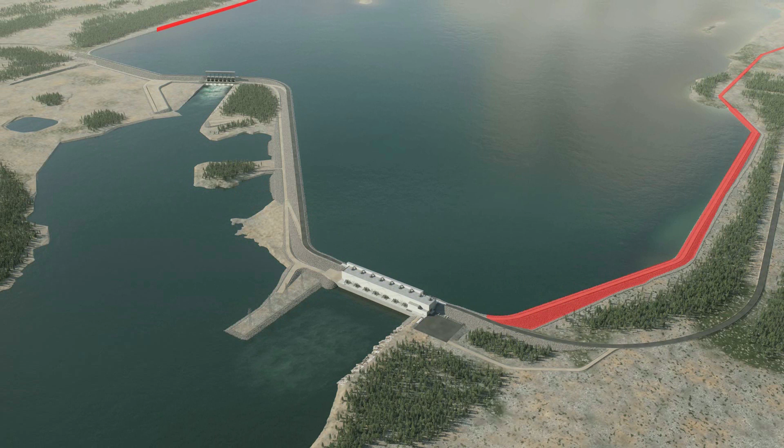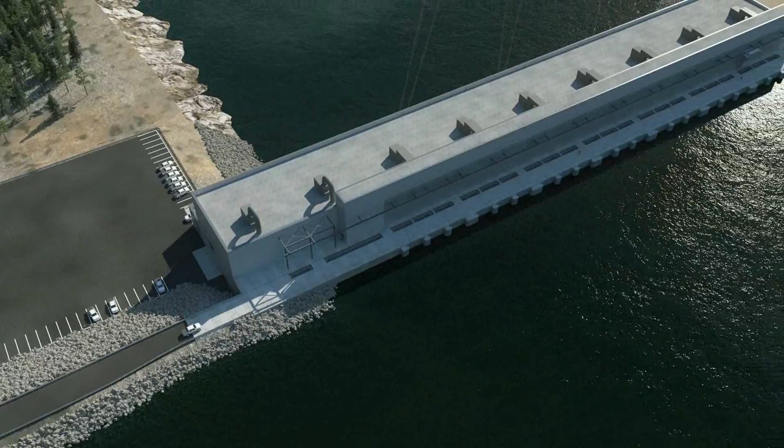The Keeyask project consists of a hydroelectric generating station and related works, including 2 long riverbank dikes on the north and south, linked to the principal structures which span the Nelson River at Gull Rapids. The principal structures consist of a powerhouse complex constructed on the north side of the river, connected to the North Dike. The spillway will be located on South Island. A central dam will connect the spillway and powerhouse structures, connected to the South Dam by means of a short concrete transition structure.

General construction process.

The proposed general construction process is based on a schedule starting on June 27, 2014 and finishing on December 14, 2019.

Construction activities will include the commencement of the Stage 1 diversion through construction of the quarry cofferdam, discontinuing flow within the northern channel of the river, as well as construction of the North Channel rock groin and the causeways to G3 and N5.

Construction of the North Channel Stage 1 cofferdam, construction of the Powerhouse Stage 1 cofferdam, diversion of the entire flow of the Nelson River through the southern channel, and construction of the Stage 1 Island cofferdam.

In order to take advantage of the 2015 summer window, the Central Dam Stage 1 cofferdam and rock groin will be built. At the beginning of winter 2014, excavation for the powerhouse will commence.

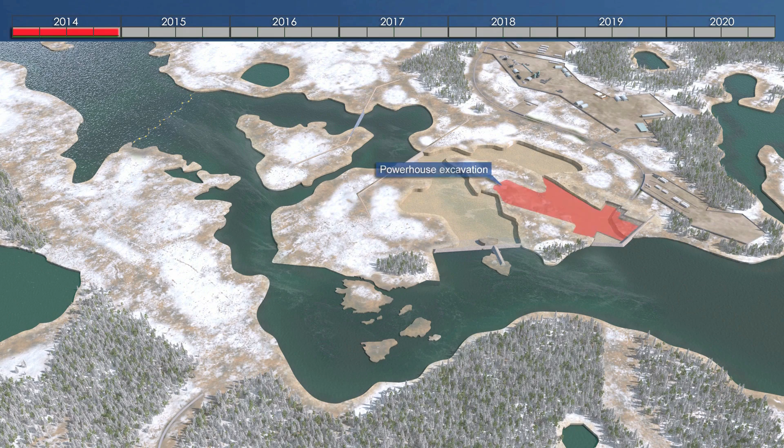The tail-race summer-level cofferdam will also be built to finalize all the excavations. During the summer window of 2015, the main body of the central dam will be constructed, leaving the connections with the transition walls for a later stage.

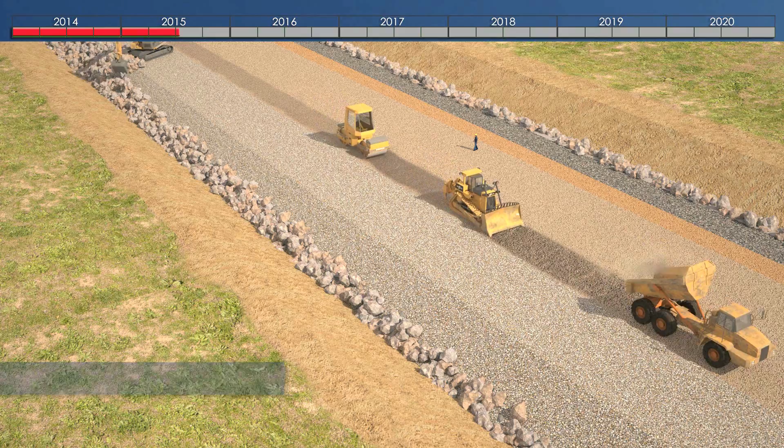In 2015, construction of the Spillway Stage 1 cofferdam will take place. The Stage 1 diversion will permit undertaking of the excavation works and construction of the principal structures. Throughout the Stage 1 diversion, the river will be confined to flowing through the southern channel of the Nelson River.

Construction of the North Dike will start in 2015, including excavation and construction of the earth structures, including the North Dam, parking lot, and North Access Road ramp.

This will see the partial completion of the northern section of the South Dam prior to the Stage 2 diversion, and the full completion of all other scheduled construction activities inside the Spillway Stage 1 cofferdam, as well as construction of the Stage 2 Island cofferdam, and finally the breaching and removal of portions of the Spillway Stage 1 cofferdam.

Beginning of the Stage 2 diversion by closing the river channel with the advancement of the South Dam Stage 2 upstream cofferdam from the Stage 1 Spillway cofferdam to the south side of the river.

It will also close the South River channel and direct flow into the open sluiceways through the spillway for diversion purposes. The Stage 2 diversion will allow construction of the South Dam, the South Dike, and access to the South Shore.

In the dry, removal of the northern leg of the Powerhouse Stage 1 cofferdam will occur. The southern leg of the Stage 1 Powerhouse cofferdam will remain in place and form part of the transmission tower spur. Construction of the transmission tower spur follows.

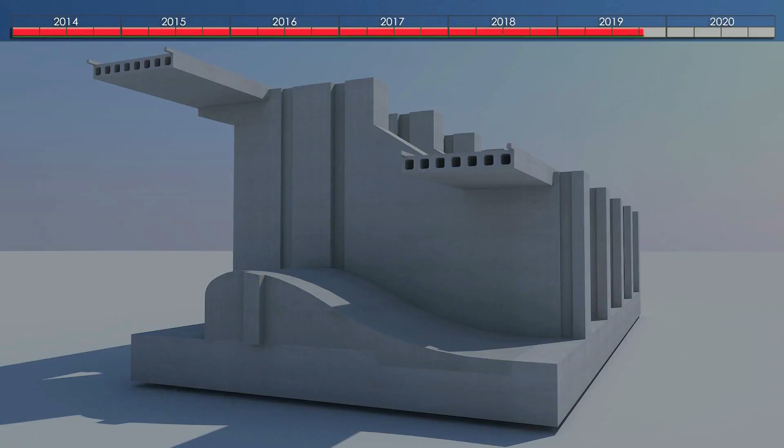Breaching and removal of the tail race summer level cofferdam. Impoundment of the forebay in stages linked to closure and construction of the spillway rollways. And finally, closure of the remaining sections of the spillway.

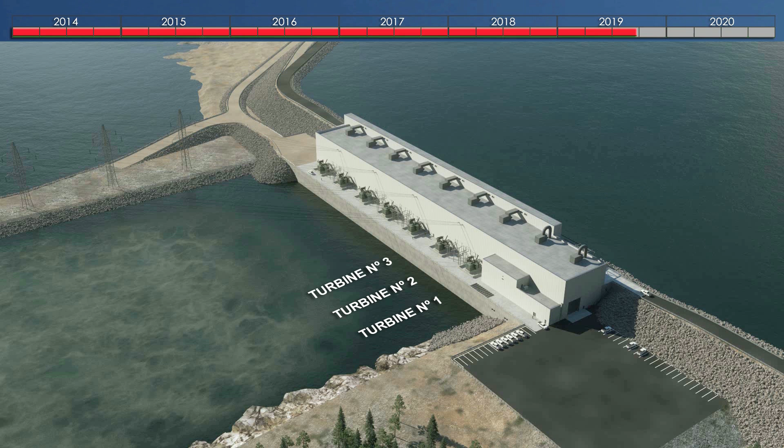Commissioning of the turbines will take place on the following dates. Turbine number 1 will be commissioned on August 16, 2019. Turbine number 2 will be commissioned on September 21, 2019. Turbine number 3 will be commissioned on October 23, 2019. Turbine number 4 will be commissioned on November 6, 2019.

Turbine number 5 will be commissioned on January 8, 2020. Turbine number 6 will be commissioned on February 15, 2020. Turbine number 7 will be commissioned on May 2, 2020.

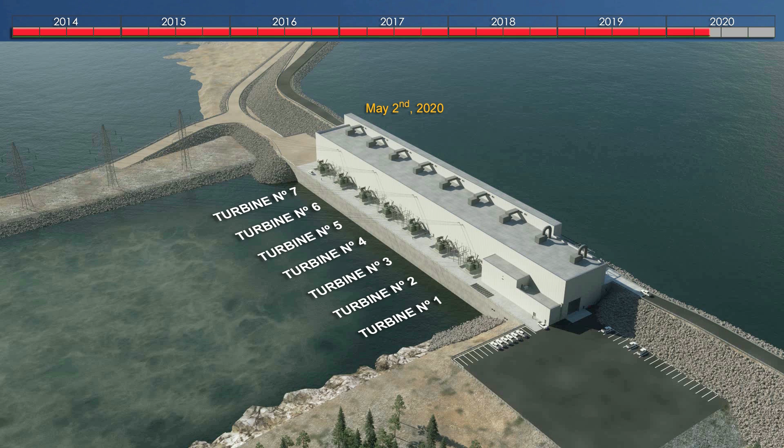Powerhouse construction process.

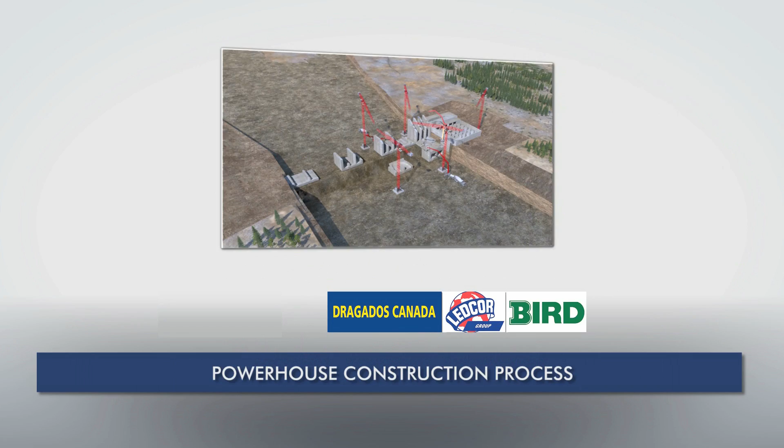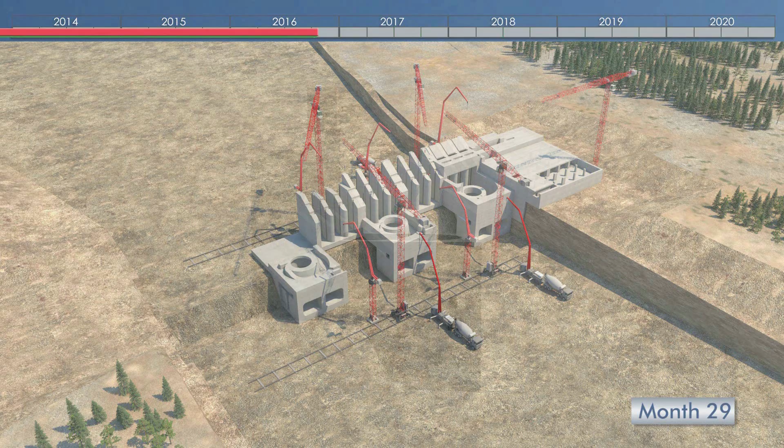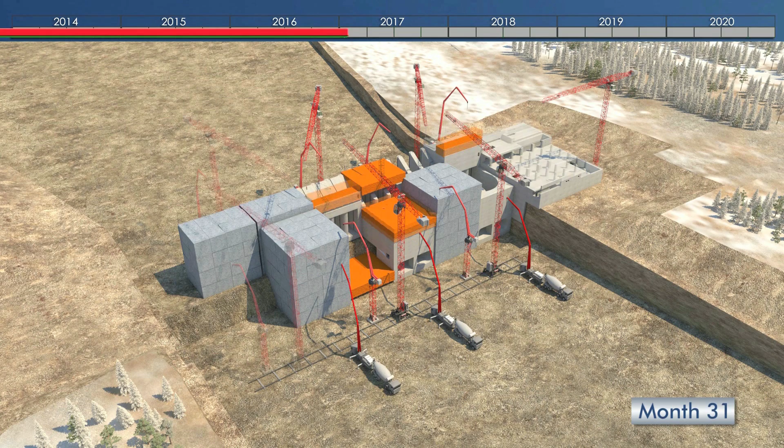The core methodology behind the construction of the powerhouse building will be to quickly erect the intake to its full elevation at 173.5 meters, as well as the lower block of the powerhouse to a level high enough to install the structural steel roofing on. This will be completed as early as possible within the time plan in order to enclose each unit, enabling work to continue under cover. A sheltered work area will facilitate work during the winter months and contribute to schedule advancement.

When the erection of any of the units occurs during the winter, hoarding will be used. Given the height and smaller size of these pours, only a winter hoarding consisting of insulated blankets will be used.

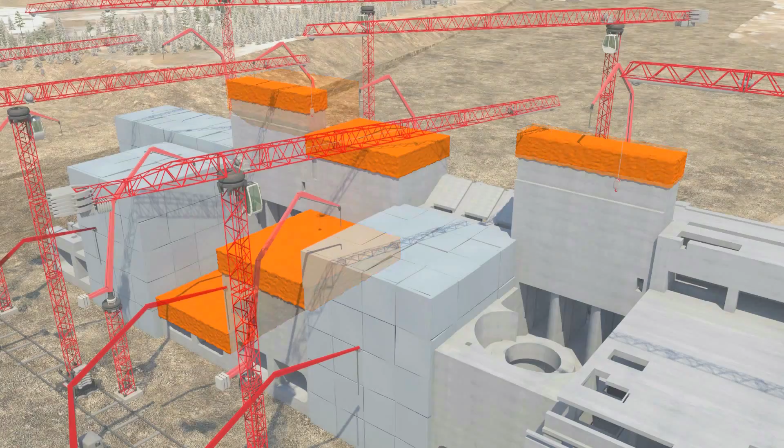The powerhouse blocks in Units 1, 3, and 5 will commence at the same time as the intake and the service bay units. To achieve this, there will be 2 shifts per day.

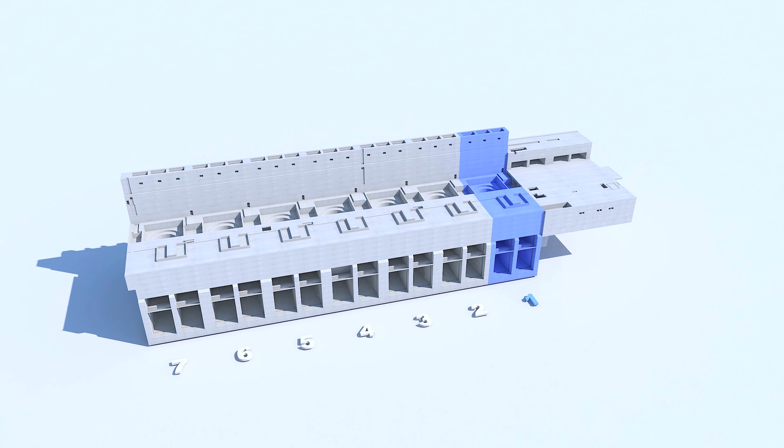Once the crews have completed Units 1, 3, and 5, they will be reassigned to the remaining units. Namely, the crew from Unit 1 will go to Unit 2 and then to Unit 7. The crew from Unit 3 will go to Unit 4. And the crew from Unit 5 will go to Unit 6.

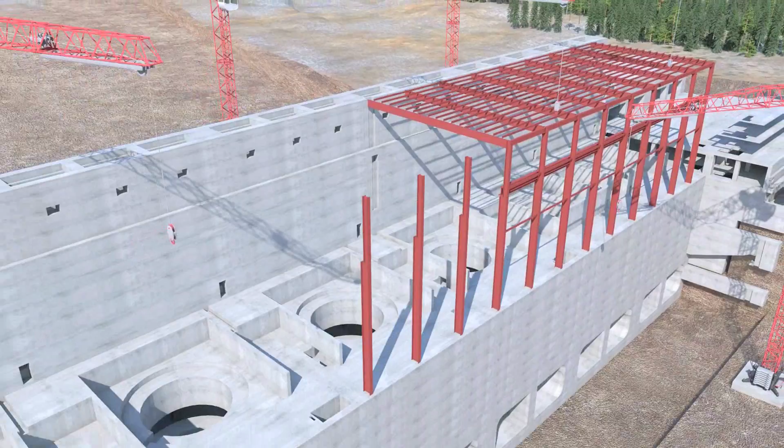The superstructures, or roof, for each unit are built in cascade from Units 1 to 7, as Manitoba Hydro requires, in order to allow the use of the bridge cranes from the service bay to each unit.

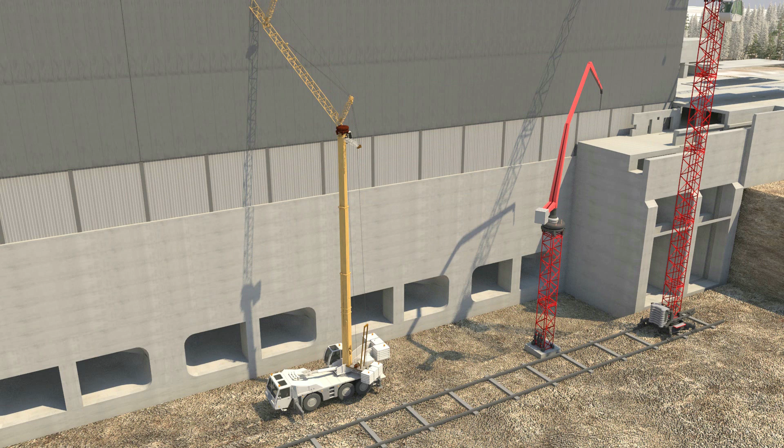The erection of the tail race will be delayed until the structural steel has been placed and the associated crane has been moved out of this position.

Given that the roofs are placed late in the schedule, 4 crews will be used at certain points. No challenges related to the increased manpower need are expected at this point, as most of the crafts from the spillway and the intake will be completed by this time.

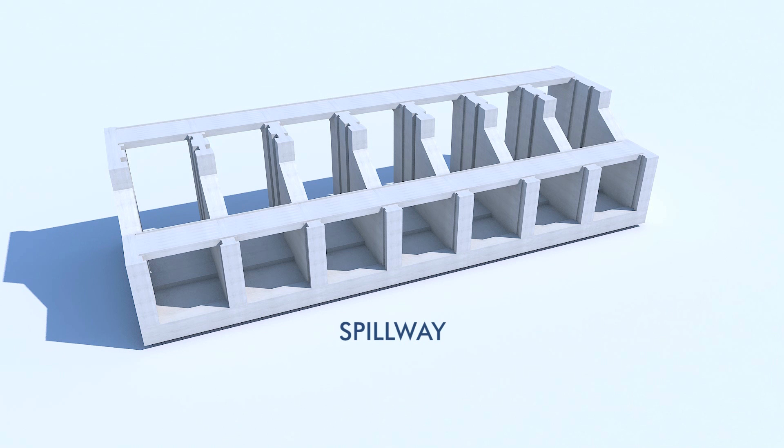Per unit construction plan.

The joint venture will begin construction of IN and PH1. Work will stop on the powerhouse once the elevation of 141.1 meters is reached in the lower cone and 143.7 meters in the walls, where the steel structure is placed.

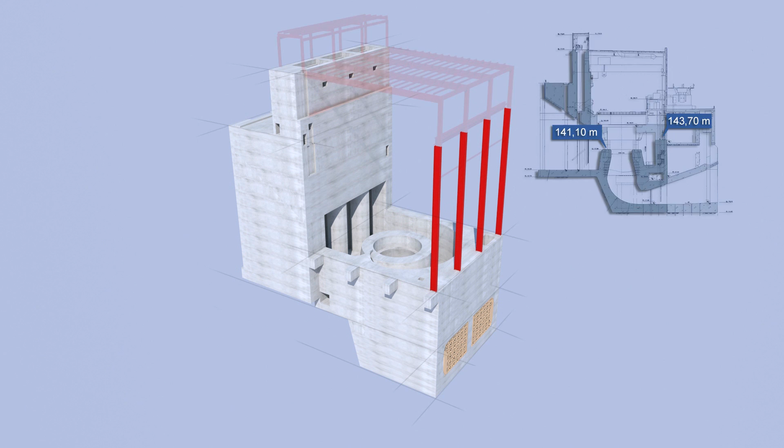Once IN and PH1 blocks are finished, the roof will be installed so that winter work may commence inside the covered area. The roof will allow the PH2 block to be completed indoors, including the concrete and mechanical elements.

Once the roof structure is placed and the crane is moved away from the tail race position, the construction of the TR1 block will commence, and then the TR2 right after.

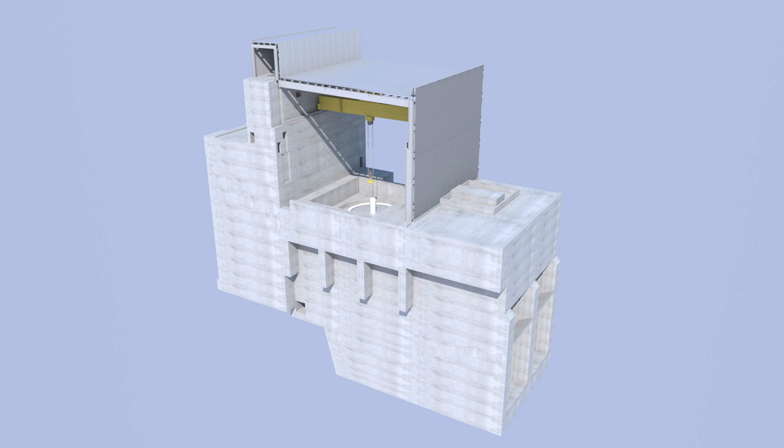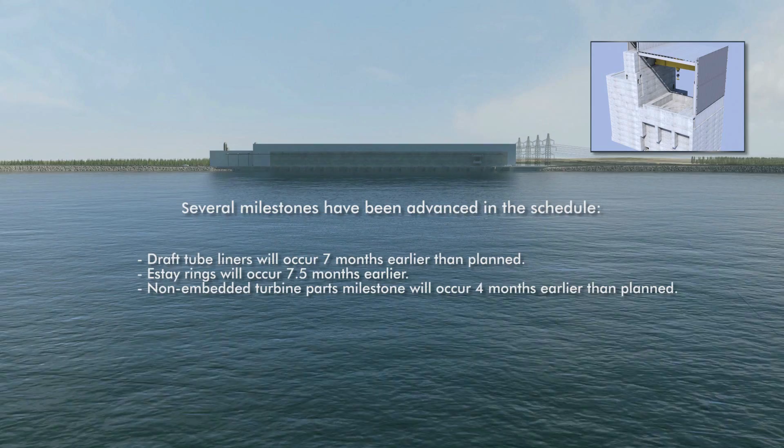The plant ready for non-embedded turbine parts milestone will occur 4 months earlier than originally planned. The ready to start final commissioning milestones now occur between 3.5 and 5 months earlier than originally planned, and the in-service dates will occur approximately 4 months earlier than originally planned.

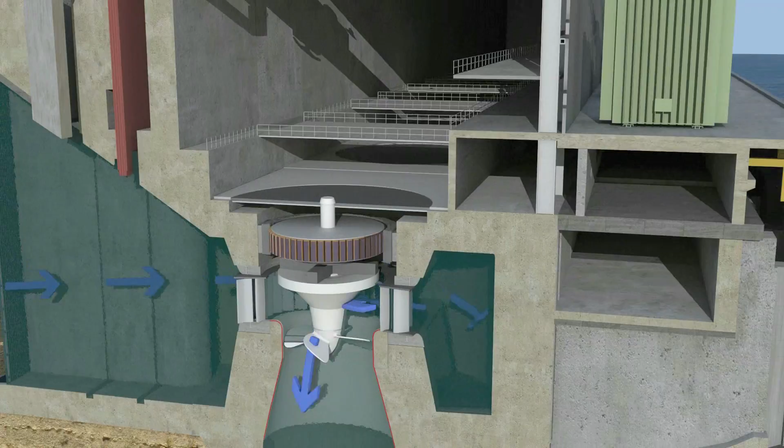Joint venture experiences on similar projects.

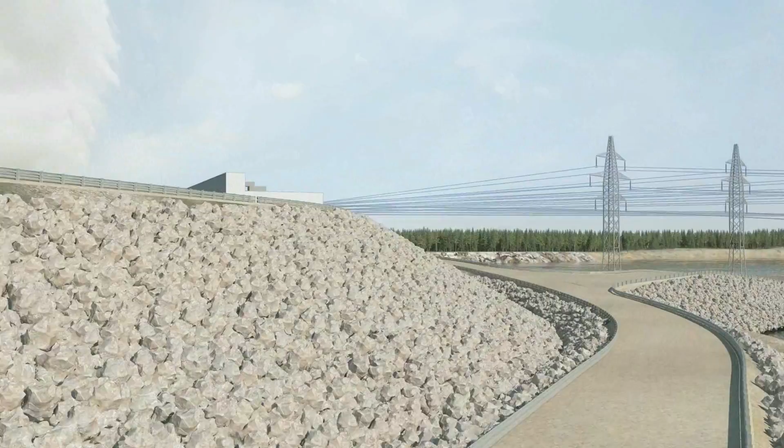Owing to the extensive experience and success on similar projects, the Dragados Canada Ledcor Bird joint venture is uniquely qualified to undertake such a challenge.

Caruachi Hydroelectric Generating Station, Venezuela.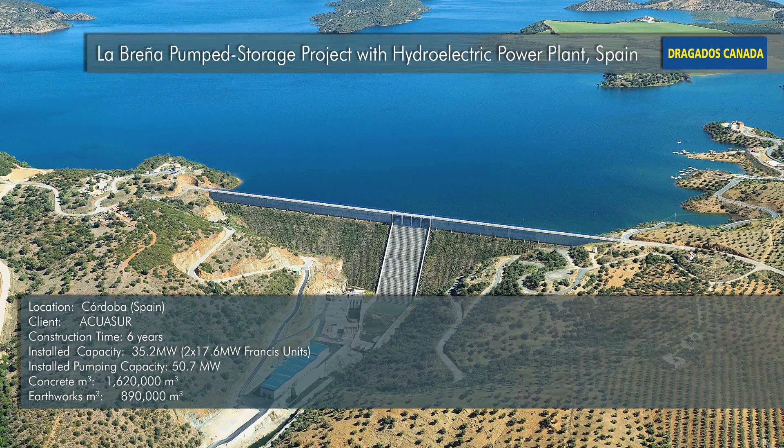Albian Sands Sand Cell 2 project.

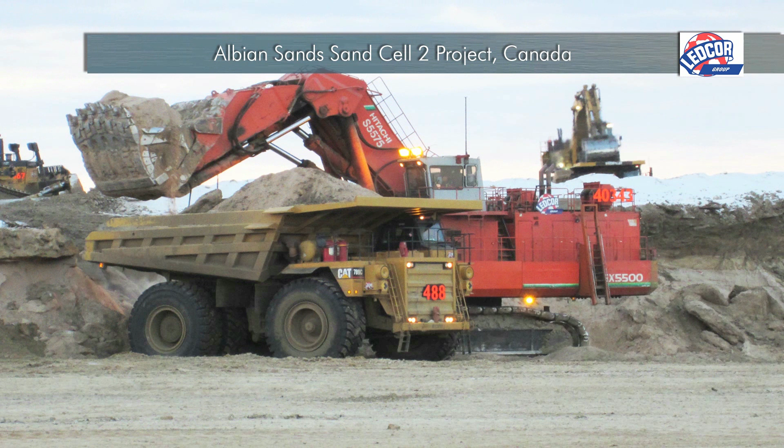Wuskwatim Generating Station.

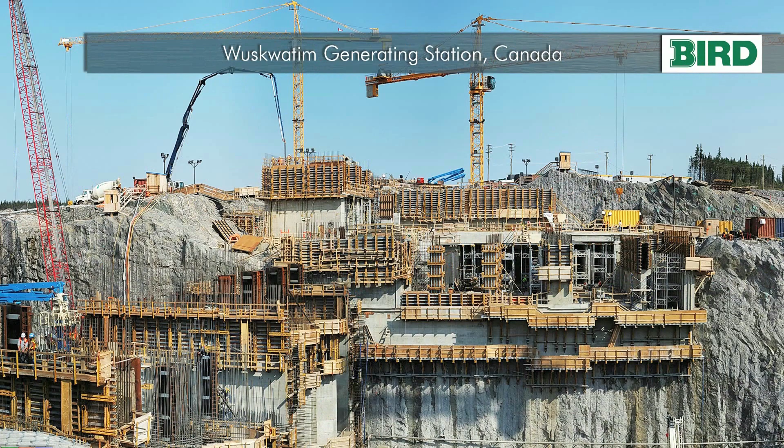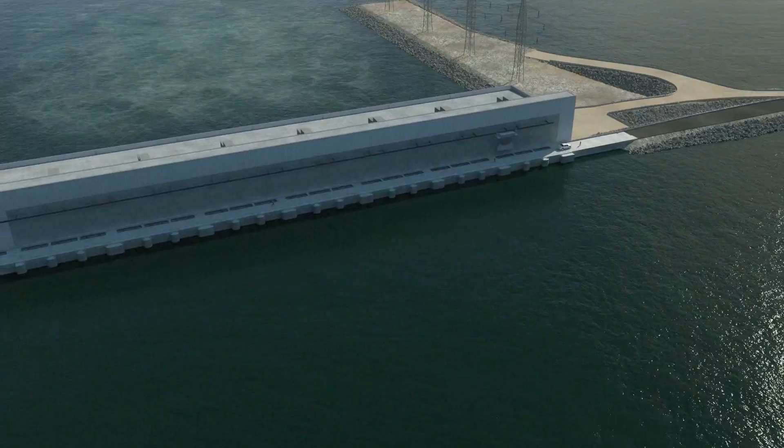The key to success for the Keeyask project will be the ability to work during the winter months, which will enable the original scheduled completion date to be advanced by around 4 months per unit.

To achieve this goal, a detailed and comprehensive analysis of the schedule has been undertaken. The logic between construction of all project elements has been studied very carefully, optimizing the critical path.

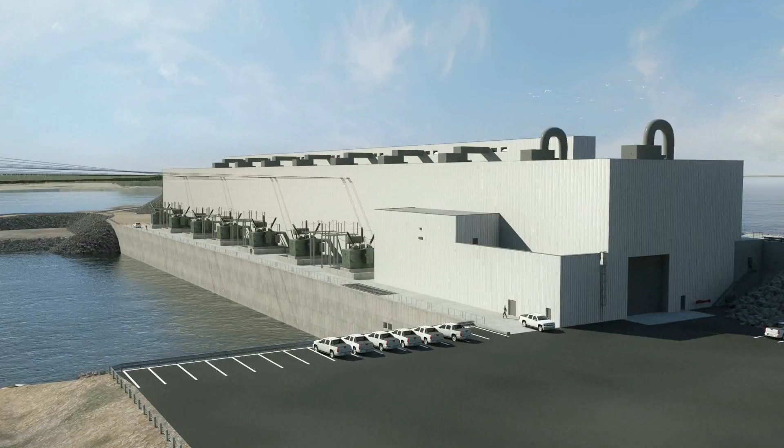The methodology and equipment demands have been developed and refined in order to maximize productivity and avoid any loss of time, which drastically shortens the schedule and saves significant costs.

Finally, it's important to mention that special attention has been paid to minimize the environmental impact during the execution of the works.

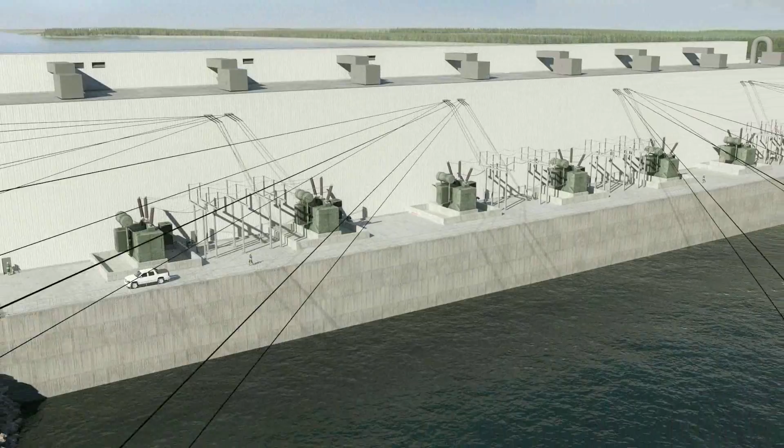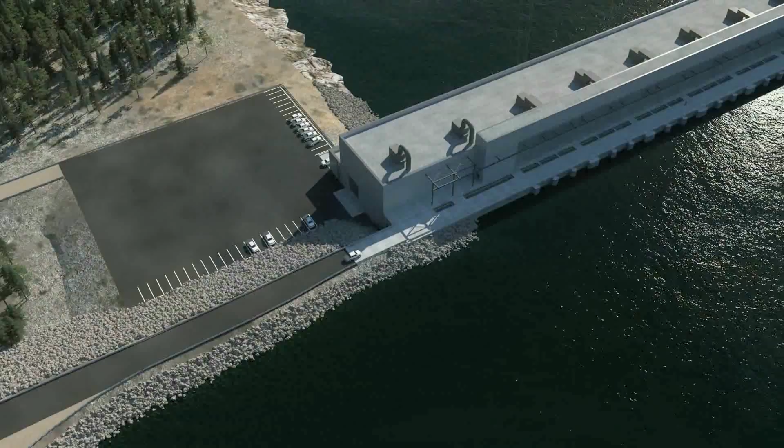The Dragados Canada Ledcor Bird joint venture is proud to assure Manitoba Hydro that its proven experience on similar projects and complete reliability in this field will ensure total success.

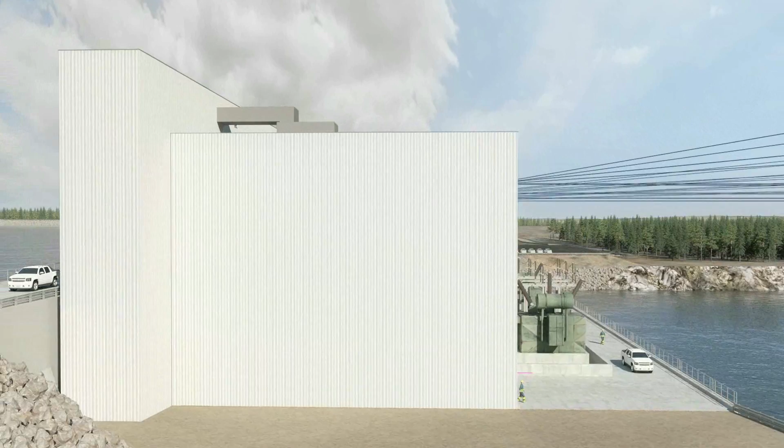The project will be constructed in record time and, most importantly, will enable Manitoba Hydro to produce and sell energy 4 months earlier than planned.